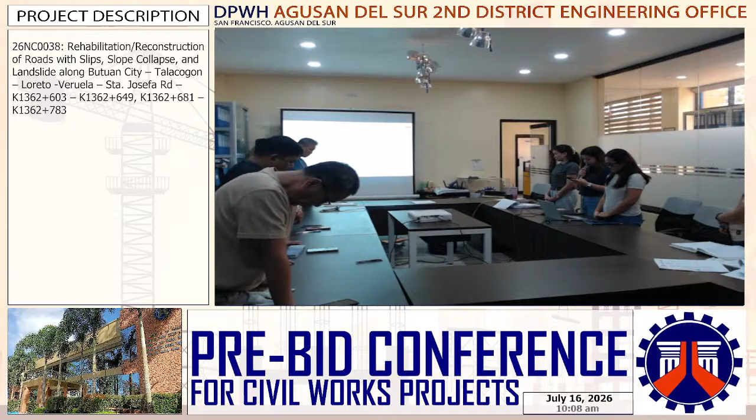Let's put ourselves in the holy presence of the Lord. Father, Son, Holy Spirit, amen. Dear God, thank you for gathering us under your loving care and protection. As we begin, we ask that you help us establish the vision of Christ, to put on humility, and to place one another above ourselves. Help us share our tasks respectfully and be considerate of one another, leaning on you for strength and guidance. May we accomplish what we set out to do and bring you honor as we do it. In Jesus' name we pray, amen. Father, Son, and Holy Spirit.

Thank you. So we are here for the pre-bid conference for contract ID 26NC0038, rehabilitation and reconstruction of roads with slips, slope collapse and landslide on the Butuan City, Talacogon, Loreto, Veruela, and Sta. Josefa Road, stations 1362 plus 603 to 1362 plus 649, and section 1362 plus 681 to 1362 plus 783. With an approved budget of contract of 51,275,560 pesos, and contract duration of 505 calendar days. For the forum of this public conference, the secretary will continue.

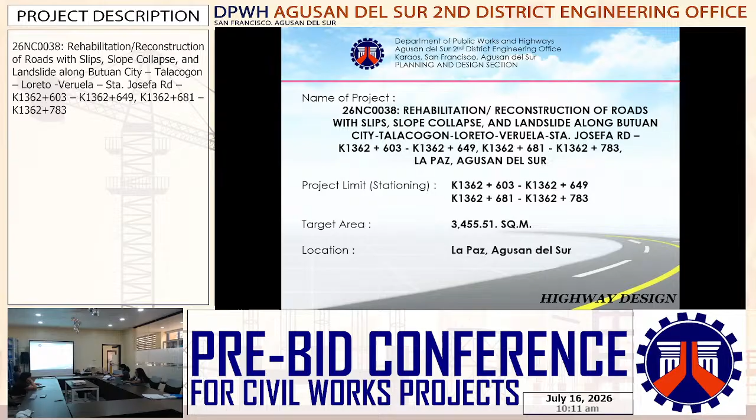With the target area of 3,455.51 square meters located at Agusan del Sur. The appropriation is 52,322,000, ABC is 51,275,560, calendar days 505, classification road rehabilitation with slope protection, source of funds 28 GA FY 2026.

So for the location map, we have the first section 1362 plus 603 to 649, and the second section is the area na gap section. So it's unpaved in this area but it's not yet hardened or paved. Since the end station is 783, and the end station for this concrete section is 809.

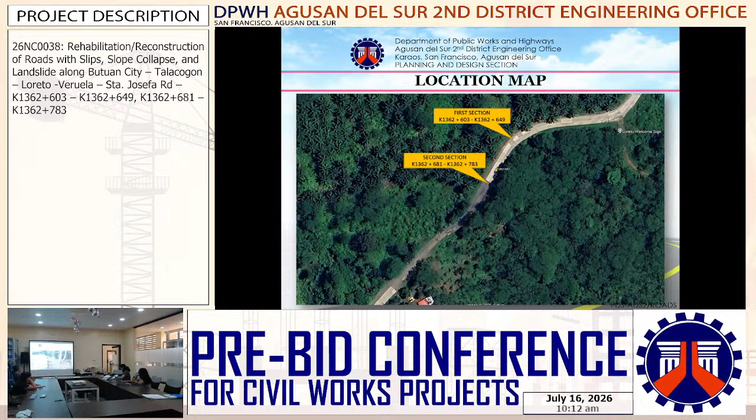Total photos taken there. For the specification of the sheet piles to be driven, on the bottom part we have steel sheet pile of Z-pile, MHZ 21-820, width of 820mm. And on the deadman part, for this part we have steel H-piles with specification and mass of 159 kilogram per meter.

For the first section, the inclusion of the construction is only the rehabilitation of the existing carriageway of 3.35, total of 6.7, and gravel for the shoulder.

And for the second section, this unpaved road area, slope protection will be constructed at the right side with three berms, to be driven with steel H-pile and Z-pile in this area. The H-pile is to be driven every 3 meters, same as the spacing of our tie-beam, so every 3 meters it will be driven.

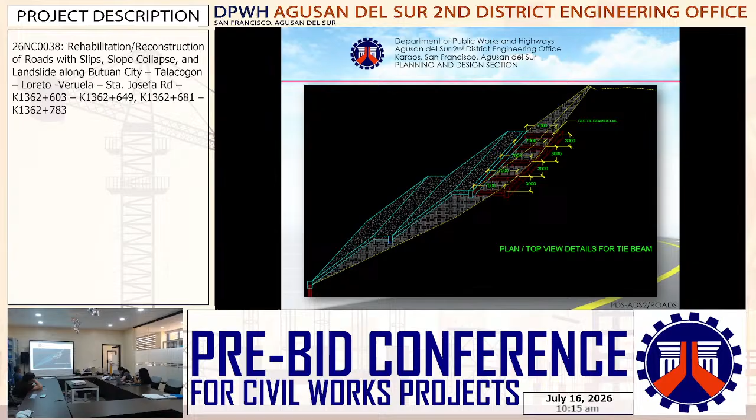And then concreting of the inner lane, the outer lane will serve as a reserve strip. So this will be concreted, with gravel surface remaining same as the shoulder. Details of the tie-beam spaced at 3 meters, including details of the tie-beam, pile cap, footing detail, and slope key details.

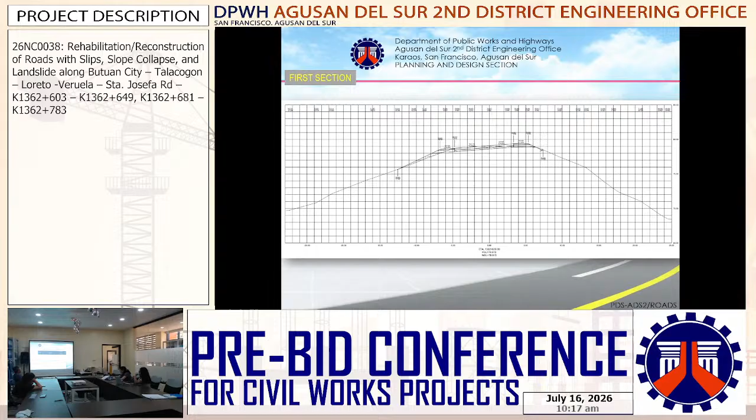For the program of works, Part A: construction of field office for the engineer, one lump sum; provision of furnitures, fixtures, equipment, and appliances for the field engineer, field office for the engineer, one lump sum.

Other general requirements: construction survey and staking, 0.102 kilometer; project billboard signboard for each; occupational safety and health program, 1 lump sum; traffic management, 1 lump sum; mobilization, demobilization, 1 lump sum.

For the earthworks: clearing and grubbing, 0.67 hectares; individual removal of trees, 16 each; structure excavation, 59.4 cubic meters; embankment from roadway or structure excavation, 1,721.13 cubic meters; embankment from borrow, 3,733.66 cubic meters; subgrade preparation, 3,009.53 square meters.

For the subbase and base course: aggregate subbase course, 622.69 cubic meters. For the surface course: gravel surface course, 287.26 cubic meters, and PCCP of 0.28 meters.

1,127.66 square meters. For the drainage and slope protection structures: steel H piles furnished, 459 meters; structural steel sheet piles furnished, 1,368 meters; steel H piles driven, 446.4 meters; structural steel sheet piles driven, 1,322.4 meters; reinforcing steel grade 40, 13,862.29 kilograms; structural concrete Class A, 189.73 cubic meters; lean concrete, 91.52 cubic meters; and concrete slope protection.

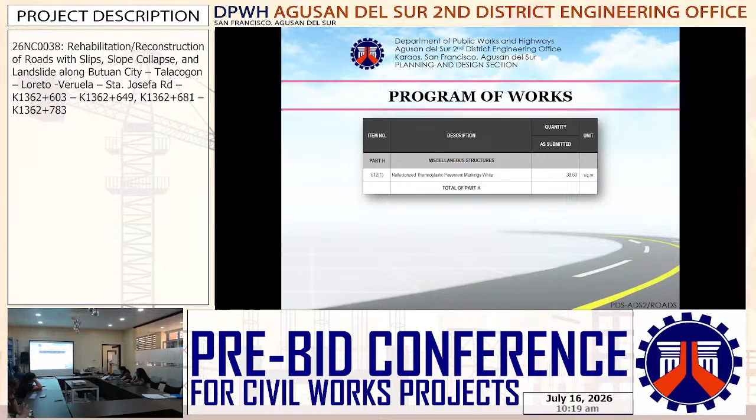For the minimum equipment requirement: truck-mounted crane 1, vibrohammer 1, backhoe 1, concrete vibrator 2 units, one-bagger mixer 1 unit, vibratory roller, cargo truck, applicator machine, kneading machine, bar bender, bar cutter, bulldozer, water truck or pump, concrete saw, concrete spreader, dump truck 4 units, payloader 1 unit, road grader motorized, transit mixer 2 units, boom truck, generator set, welding machine, plate compactor, total station and joint sealer machine.

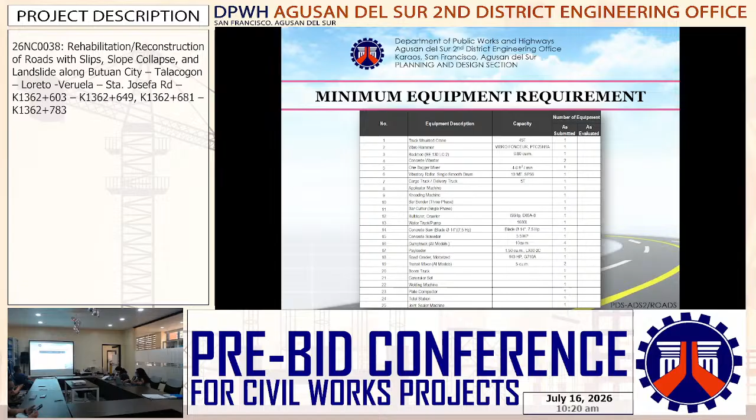For the material source: reinforcing steel bars, steel sheet piles, and steel H piles will be taken from Davao City, with a distance of 181 kilometers.

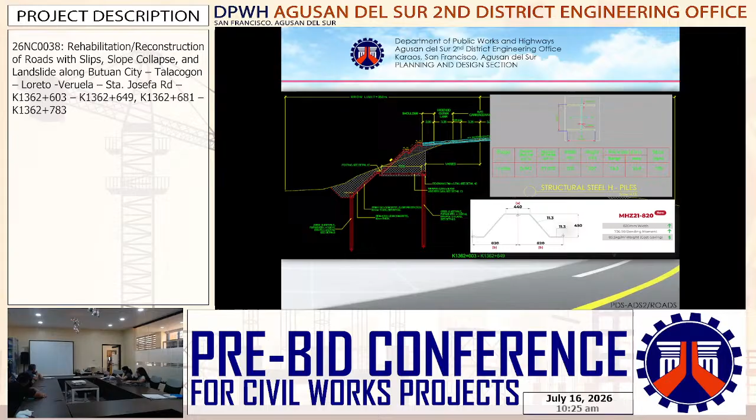So, Helena, we proceed with the documents.

For the bidding documents, relation to bid, the Department of Public Works and Highways, Agusan del Sur, 2nd District Engineering Office, Barangay Karaos, San Francisco, Agusan del Sur, through the GAA FY 2025, intends to apply the sum of 51,275,560 pesos only, being the approved budget for the contract to payments under the contract for the project with contract ID number 26NC0038. Rehabilitation and reconstruction of roads with slips, slope collapse and landslide along Butuan City, Talacogon, Loreto, Veruela, Sta. Josefa Road, kilometer 1362 plus 603 to kilometer 1362 plus 649, and kilometer 1362 plus 681 to 783.

With an ABC of 51,275,560 pesos. Brief description of works: rehabilitation of road and construction of reinforced concrete slope protection with steel sheet piles. Contract duration, 505 calendar days. Bid documents fee, 50,000 pesos.

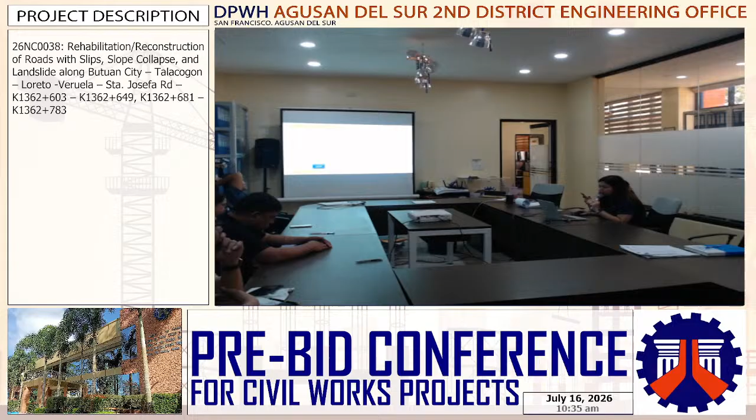For further information, we may refer to Engineer Edwin Tinacorda, the BAC chairperson. That would be all to share for the bidding documents.

Thank you. Any questions or clarifications on the documents for contract ID 26NC0038?